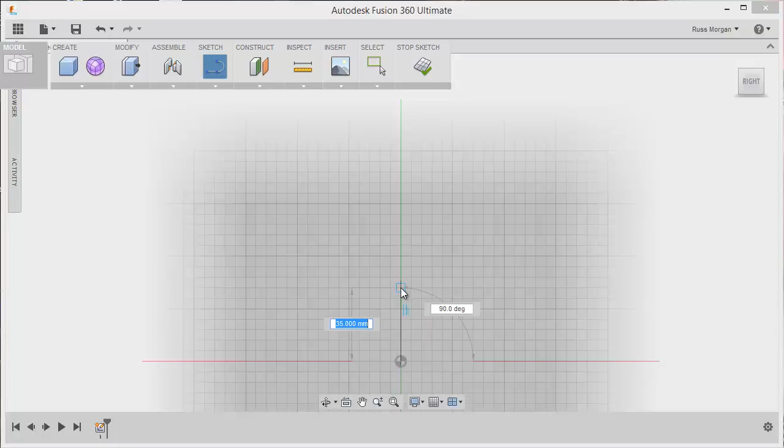Okay, we're going to have a look at making a bottle using the sketch technique. So here we go. I'm going to choose a sketch, choose a plane. One of the side planes is good. Just going to move my page down a little bit, and I'm going to go from the center point upwards, and I'm going to go for maybe 100 mil.

Okay, I'm going to come from there. I'm going to come across. I'm going to zoom in a bit so I can see what I'm doing, and I'm going to go for 10 mil. And I'm also going to come down on that same line 10 mil, and I'm going to finish there, right click and say OK. I'm going to come down to the bottom of my line, and I'm going to draw a straight line again. This time I'm going to come out maybe 30, maybe 25, something like that.

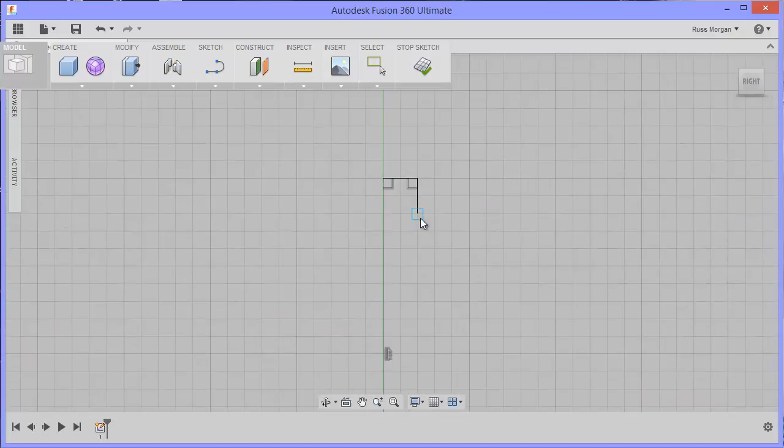20 will do. Okay, I'm going to swap over now, and I'm going to go for an arc, a 3-point arc. Now with a 3-point arc, it basically wants you to know where your start point is, which is going to be there for the first one, an end point, which can be about here, and then a midpoint, so somewhere in between. To make a curve shape, I'll go for that one. So there's my first one.

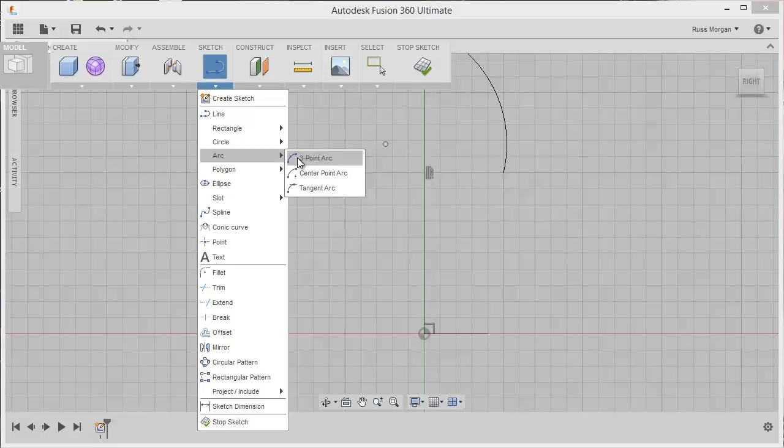I'm going to use the same tool again. I'm going to go for the 3-point arc. I'm going to do my first point, my last point, and a midpoint. You can see it trying to lock to different positions there. If I zoom in, I've got more control over the lock. I can lock to different positions there. Go for that one. Zoom back out again, and I'm going to finish off with the same tool again.

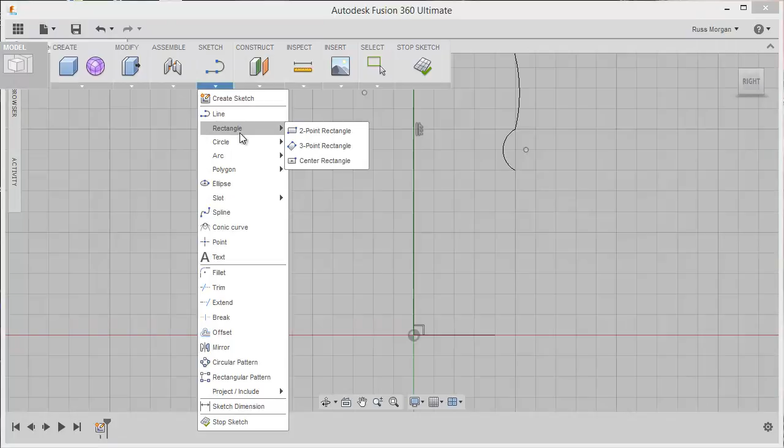Now I could have used any of these drawings. I didn't have to use arcs, but you'll see why I've done that in a minute. So end point, start point, and one in the middle. Something like that will do. Okay, so I'm going to click Stop Sketch, and if you see now, if I go into my isometric view, there's my kind of silhouette of a shape.

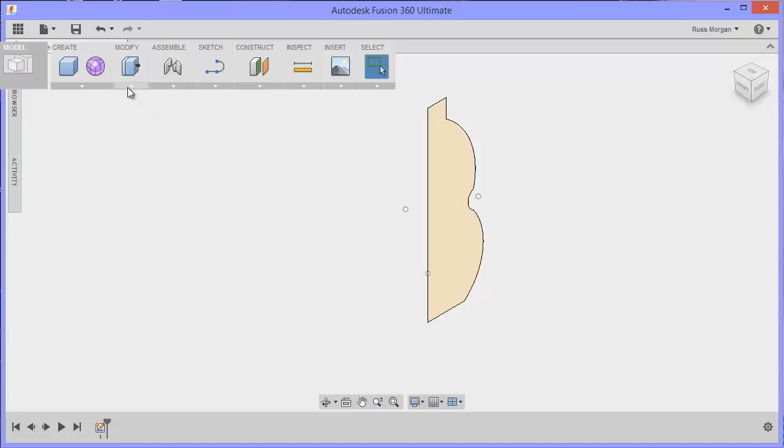It's doing nothing, but I can actually now go in and I can do what's called a revolve. Choose revolve. It says where's the profile, click on the profile, click on the axis. Where's the axis? I want to go along this one here. Watch what happens when I click. There you go, bang, all the way around. I'm going to press enter, and I'm going to accept those values. I'm not going to change anything.

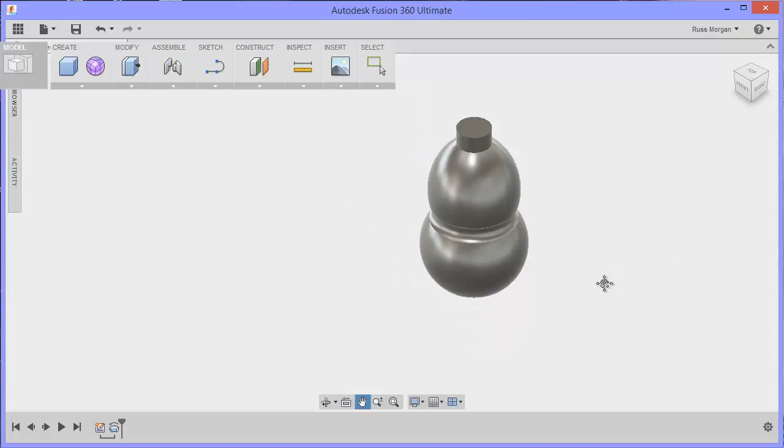There's a bottle shape. It's not doing an awful lot at the moment, but you can see that it's very easy to make, and I can do some things like, if I want to add a screw thread onto the top of it, I can go for that and just find my thread. There's thread, click on this part. Now I don't necessarily want the thread to be that kind of thread. I can change all the things to do with the thread on here afterwards.

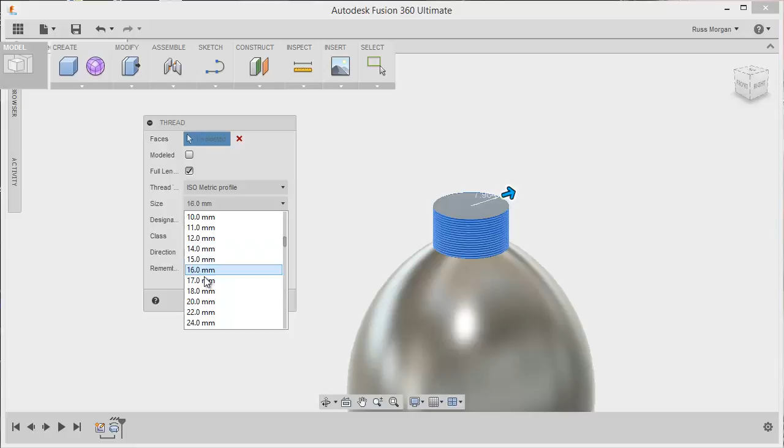I'll leave it on what it was on there because it looked okay, but I'm going to say I don't want it to be full length. I want it to be maybe half the length, something like that. I can play around with it. I can always come back and edit it again later.

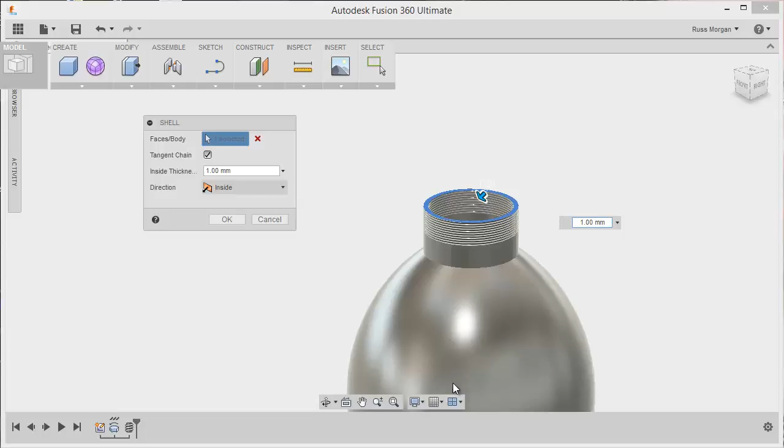And then finally, what I might want to do is go for a shell. Okay, shell basically means take the inside out. So I'm going to click on this top surface here. Okay, it's shelling it to 0.29 of a mil. That's probably too skinny. So I'm going to swap that to a 1 and get rid of those and put 2 zeros in. So it's going to be 1 mil thick on the inside. Click OK. And if I swing it around so you can see it, there's the inside of my bottle. So that's a very quick way of doing it.

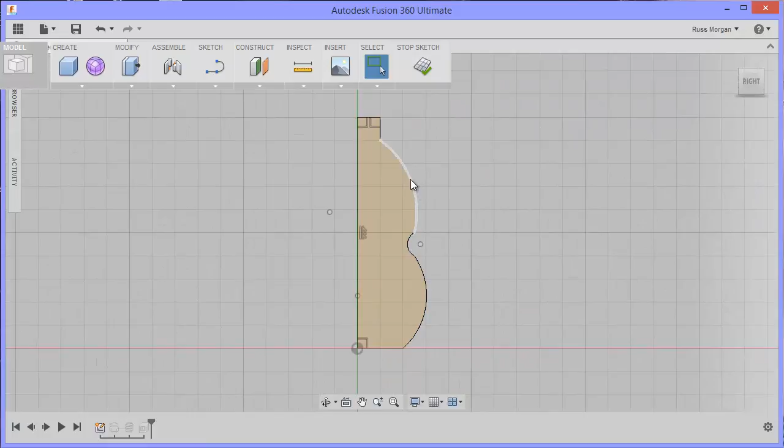Now if I wanted to, I can always go back in. I can right click and I can edit my sketch. Let's just click off it first. Go back. You can't quite see on the screen. I've right clicked on edit sketch. There's my profile. I can come back in and I can change some of these things if I wanted to. Change the angles and see what happens on this if I make it bigger and smaller.

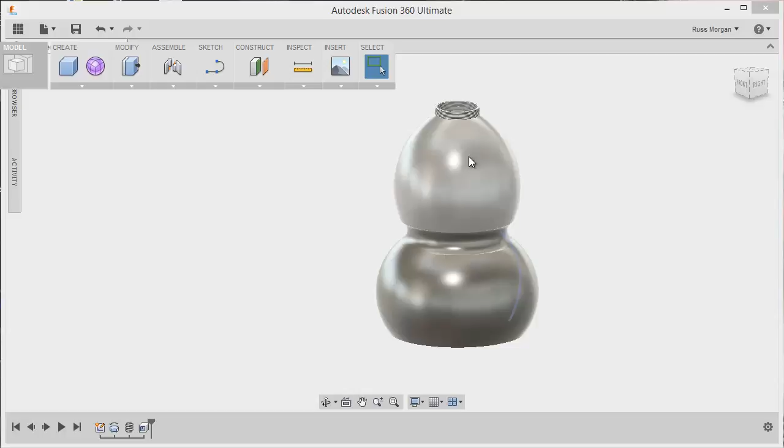Flick back out again by saving the sketch, and you can now see the new curvature. So it's still taken these same commands that came afterwards, so I can edit it at any point. I might decide that this looks way too weird now, so I'll go back and edit it again. But that's how you do it using a sketch.